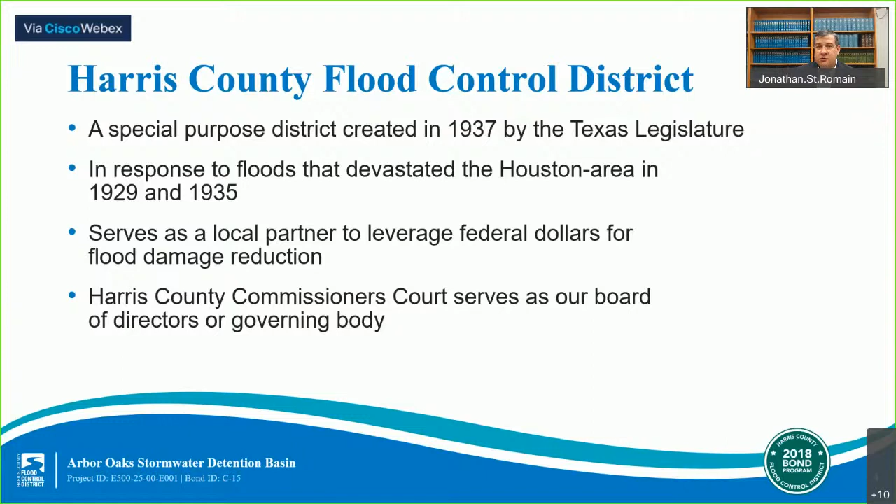The Harris County Flood Control District is a special purpose district, created by the Texas legislature in 1937 in response to devastating floods that hit the Houston area in 1929 and 1935. The Flood Control District was created to serve as a local partner to leverage federal funding for flood damage reduction. Our mission has greatly expanded over 80 years with billions of dollars in infrastructure improvements in the ground. While we are a separate entity from Harris County, the Harris County Commissioners Court serves as our governing body.

The mission of the Harris County Flood Control District is to provide flood damage reduction projects that work with appropriate regard for community and natural values. One of the most difficult challenges we face is constructing effective projects that are sensitive to community and natural values in a highly urbanized area.

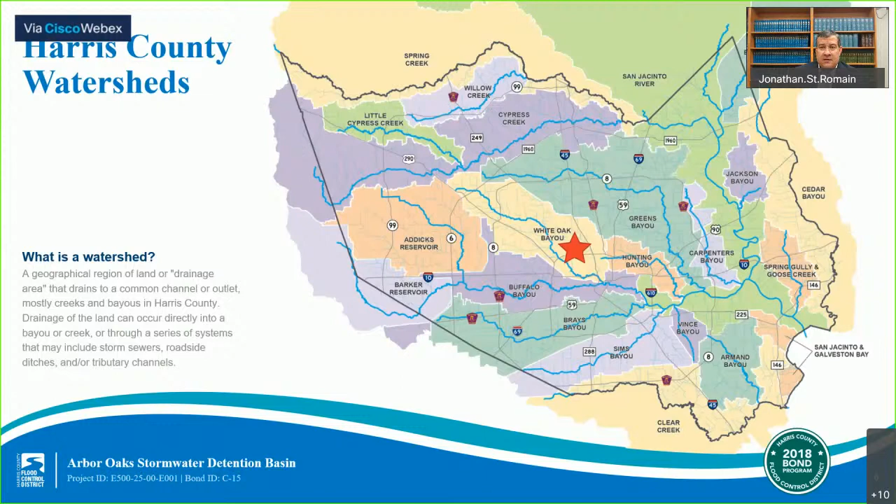Harris County includes 22 main watersheds, totaling approximately 1,800 square miles and more than 2,500 linear miles of channel. 2,500 miles is approximately the distance from New York to California. Each watershed has its own unique characteristics and needs, and tonight we're in the White Oak Bayou watershed of Northwest Harris County.

Our area is flood prone, and here are some reasons why. We're prone to extreme rainfall, including tropical storms and hurricanes. We have a flat and slow draining landscape, and we have clay soils that just don't soak up excess rainfall quickly.

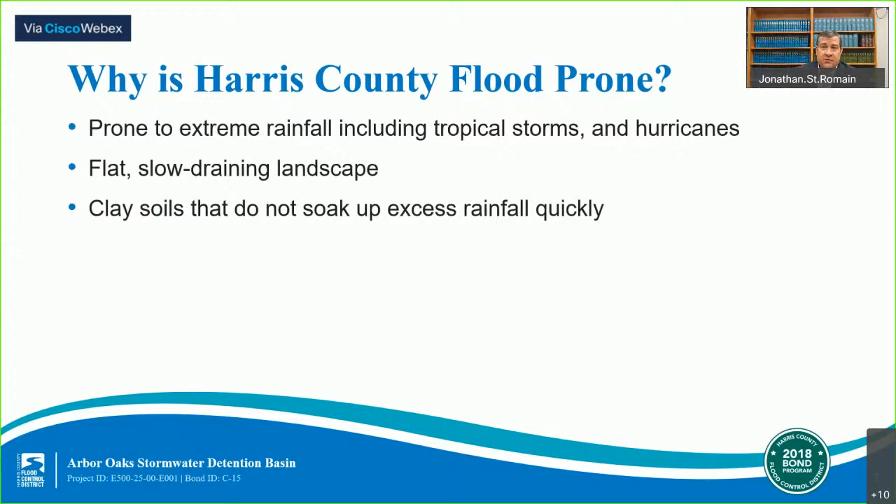In the middle is a stormwater detention basin, sometimes constructed by the Flood Control District. When storm sewers are increased, this creates an increase in runoff. Since it's our policy to avoid impacts to properties downstream, detention basins help to safely take in and temporarily store excess stormwater during heavy rain events. Often we participate with Harris County precincts, utility districts, and others to add recreational amenities such as trails to these basins and along our channels.

On August 25th, 2018, Harris County voters approved $2.5 billion in bonds for flood risk reduction projects. This vote followed a series of meetings across Harris County in each watershed, which resulted in a list of what is now 181 bond projects. 160 of those 181 projects have been initiated so far, including 7 projects in the White Oak Bayou watershed.

A total of more than $1.2 billion in partnership funding has been secured so far to stretch the 2018 bond program even further. The actual timing of each individual project will depend on a variety of factors, including environmental permitting, right-of-way acquisition, and utility relocation, and in some cases, requirements of a particular grant. That said, project lists and projected schedules are updated regularly on our website.

While the bond was for $2.5 billion, the full cost of every project in the bond tables is almost $5 billion. So we made it clear from the outset that we would need funding partners to fully construct the projects in the bond program. As I mentioned, we've had some success so far, having secured more than $1.2 billion in partner funds. This graphic illustrates the many sources of those partnerships, including federal, state, and local funding that the Flood Control District is working to secure for Harris County.

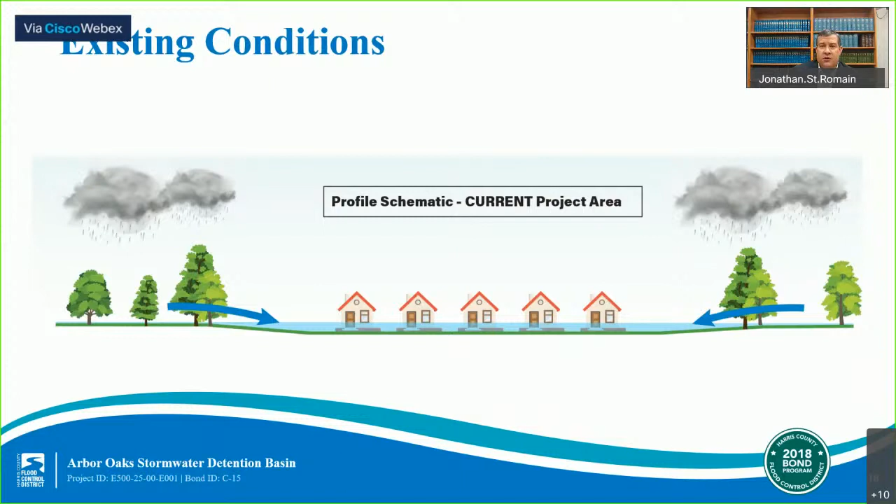The proposed project site is located within the 100 and 500-year floodplain, and along with Harris County's clay soils that do not readily absorb stormwater, the topography of the area creates a bowl-type effect that naturally causes stormwater to collect. By creating a stormwater detention basin within this area of Arbor Oaks, we can leverage the natural topography and increase the stormwater storage capacity to reduce flood risks for the surrounding area.

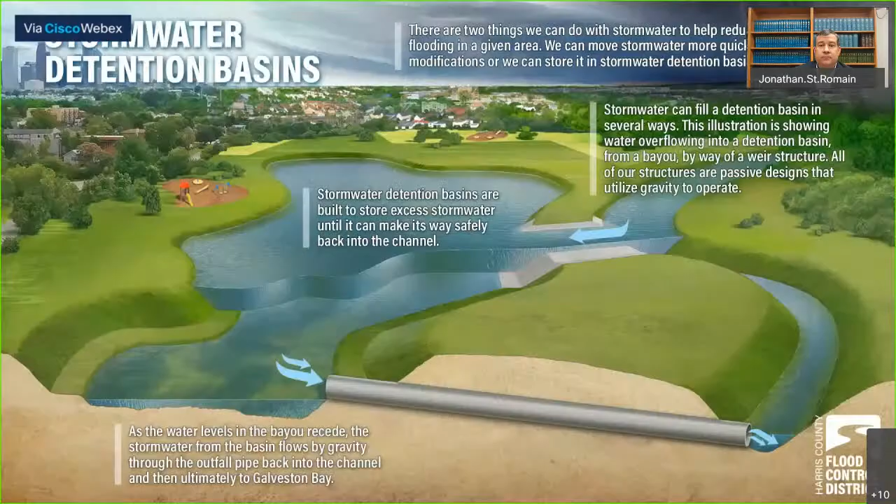There are two things we can do with stormwater to help reduce the risk of flooding in a given area. We can move stormwater more quickly by channel modifications, or we can store it in stormwater detention basins. A stormwater detention basin is built to store excess stormwater until it can make its way safely back into the channel and then ultimately to Galveston Bay.

There are several ways that stormwater will fill the detention basin, but all of our structures are passive designs that utilize gravity to operate. This illustration is showing water overflowing into a basin from a bayou by way of a weir structure. As the water levels in the bayou recede, the stormwater from the basin flows by gravity through the outfall pipe back into the channel.

The flood control district typically constructs two types of stormwater detention basins: wet bottom and dry bottom. Both fill up during heavy rain events and then drain as the receiving channel recedes. The difference is that one has a permanent pool of water and one has a dry and grassy bottom.

A wet bottom basin, which is what we are recommending for this project, typically has a permanent pool of water and can provide habitat for a variety of wildlife. A dry bottom basin, on the other hand, will fill up during a heavy rain event and then completely drain out once the storm has passed, and it can provide the opportunity for recreational amenities such as sports fields or parks to be built by others.

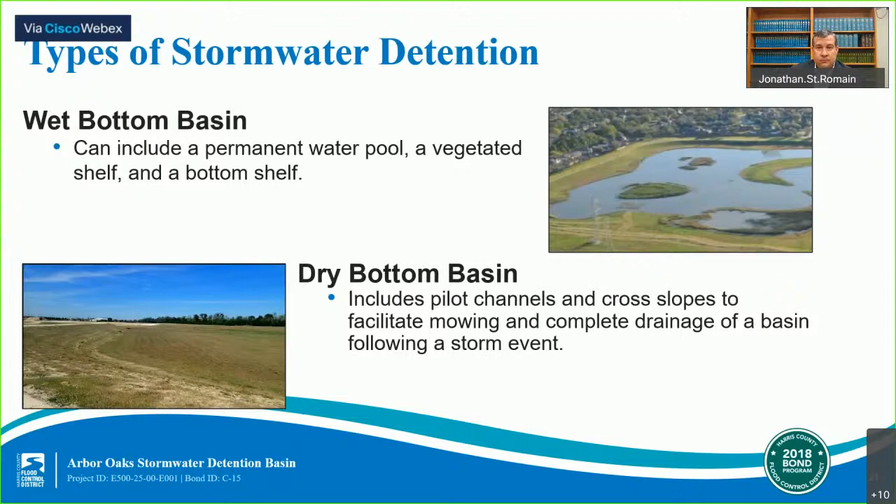Thank you, Jonathan. Melissa, Sergio is asking who purchased the Inwood golf course? Sure. The Inwood Golf Course was purchased back in 2011 by the City of Houston. And then later, Harris County Flood Control District and the City of Houston entered into an interlocal agreement to define that project and say that we're going to work with the City of Houston to build and construct that project.

Thank you, Melissa. Jonathan, Jessica is asking when we decided to start this project, and can you also elaborate on the bond program and if that played a part? Sure, the bond program definitely played a part, as well as the receipt of our Natural Resources Conservation grant. The funding is always a big thing, and when we get that availability, that a lot of times can help make projects happen.

All right, thank you. We are continuing to get questions in from you. Jonathan, we have a question about trees. Will trees be cut down? If yes, will they be replaced later?

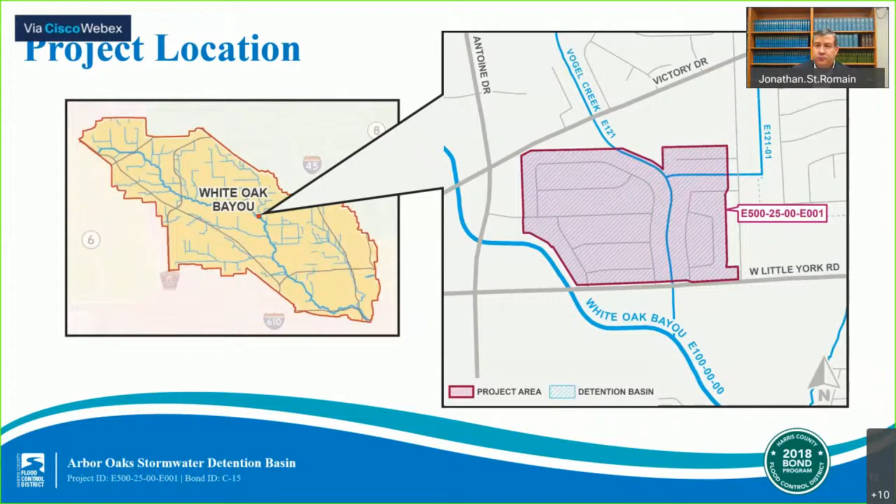Sure, yeah, and we can start on slide 12 here. Back to a little bit of the background of the project. White Oak, we're in the White Oak Bayou watershed, and it's approximately 26 miles long, flows from US 290 southeast to its confluence with Buffalo Bayou near downtown. This project area is located a little more than midway down the bayou, where it intersects with Vogel Creek in what is known as the Arbor Oaks subdivision, which was developed in the early 1970s.

Following Tropical Storm Allison and beginning in 2003, the Harris County Flood Control District initiated a robust countywide voluntary buyout program to help move eligible homeowners out of harm's way. That program included several homes, many homes in the Arbor Oaks neighborhood. And then following Hurricane Harvey, the 2018 bond program has allowed us to assess flooding needs and look at the property we already own to help reduce the risk of flooding throughout Harris County.

The project timeline.

Following voter approval of the 2018 bond, the Flood Control District initiated Bond ID C-15, the Arbor Oaks Stormwater Detention Basin. In 2019, Harris County Commissioners Court accepted the grant from the Natural Resources Conservation Service, NRCS, which is helping fund the design and construction of this project. It's important to note that under this NRCS grant guidelines, we must complete construction and other restoration efforts by October of 2024.

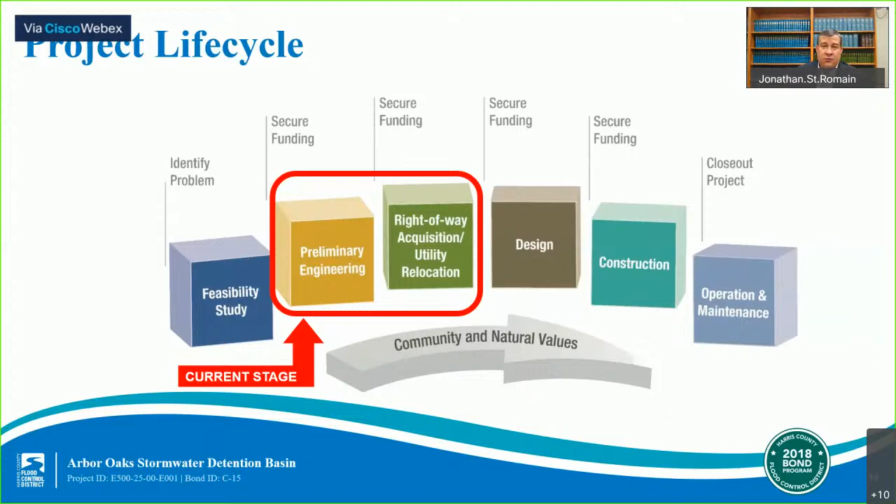Jonathan, residents in the area want to know if this basin will prevent them from flooding again. How can we answer that question for these concerned residents?

While we can never guarantee that anyone won't flood again, we can say that this project, along with the other nearby projects in the White Oak Bayou watershed, will positively benefit homes by reducing flood risk in the watershed.

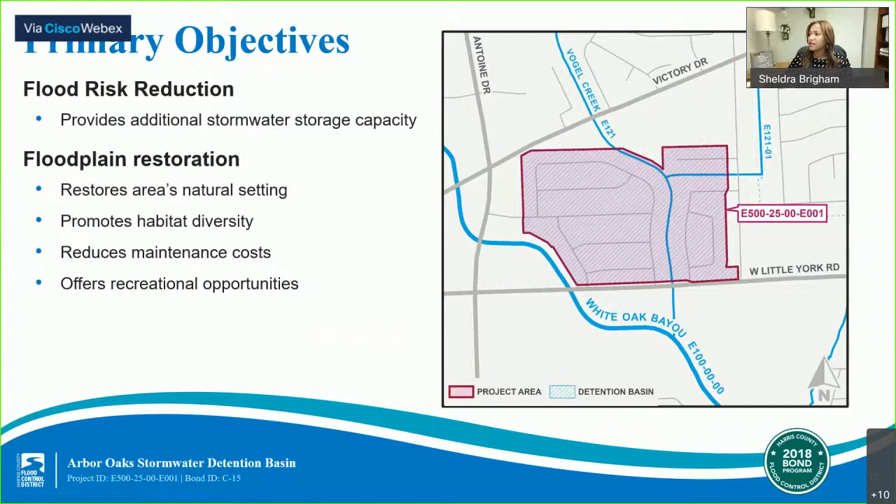We have a question from Nalani. Nalani says the presentation was excellent and self-explanatory in many ways, but how will this system affect flooding in my area, specifically at Antoine and Armcliffe, the intersection south of Eisenhower High School? Does the Stormwater Detention Basin tend to help Vogel Creek flooding more than west of Antoine?

You guys got all that? Yeah, I got all that. And...

Nalani, we may have to get back to you on the specific question. Right offhand, I can't look at our maps and compare the exact benefits that area will receive. But any specific questions like that, you can submit through our online system. I think we've got instructions here in the presentation on how to do that.

I'd just like to jump in and mention that the Inwood Forest Detention Basin is on the west side of Antoine Drive as well as the east, so it's going to provide benefits more specific to your area, as well as the federal White Oak Bayou project we're working on right now. But for any further specific questions, that project is now shown on the screen. You can submit your question, and we can get back to you with further details.

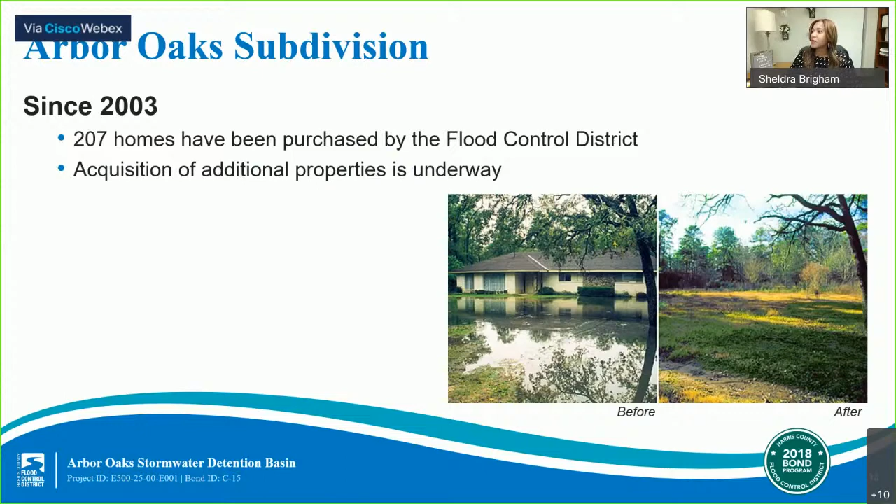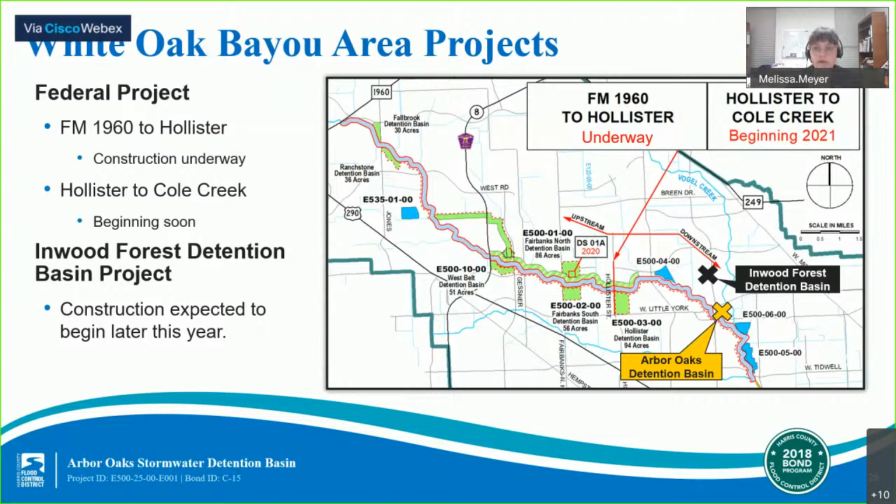Jonathan, Mary is asking if the detention could cause flooding to happen in areas that don't normally flood. So no, the detention basin would not cause flooding in areas that don't normally flood. For each and all of our flood control projects, we do impact analyses to ensure there is no adverse impact, or negative results, anywhere upstream or downstream that would take place due to our projects. Our aim is always to provide flood damage reduction projects that work, while also making sure there are no negative impacts anywhere else.

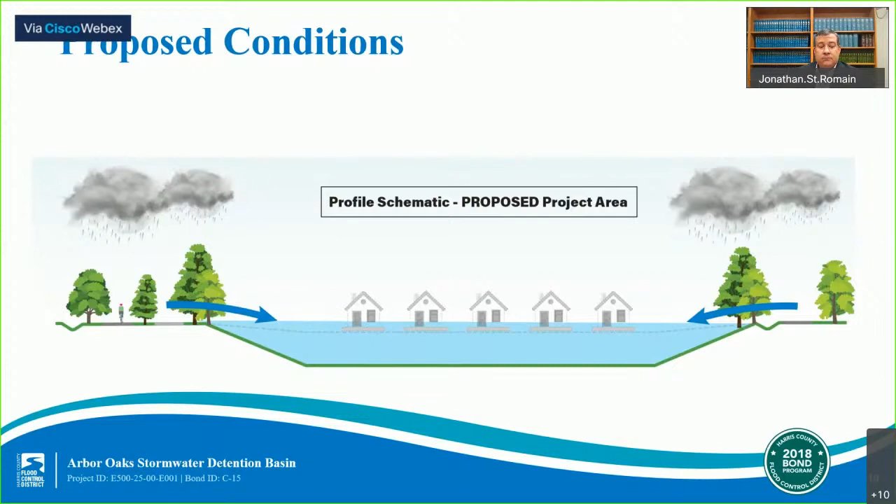Thank you, Jonathan. Can you talk about how the area near the basin might change for residents that live nearby but not in the footprint of the basin?

Well, sure. Ultimately, residents could have a nearby large area that will have been restored to what was previously existing floodplain, and also has these aesthetic features. We talked earlier about working with partners such as Houston Parks Board to potentially provide some connecting trails. So we think it could change for the better, providing a nice feature to the area.

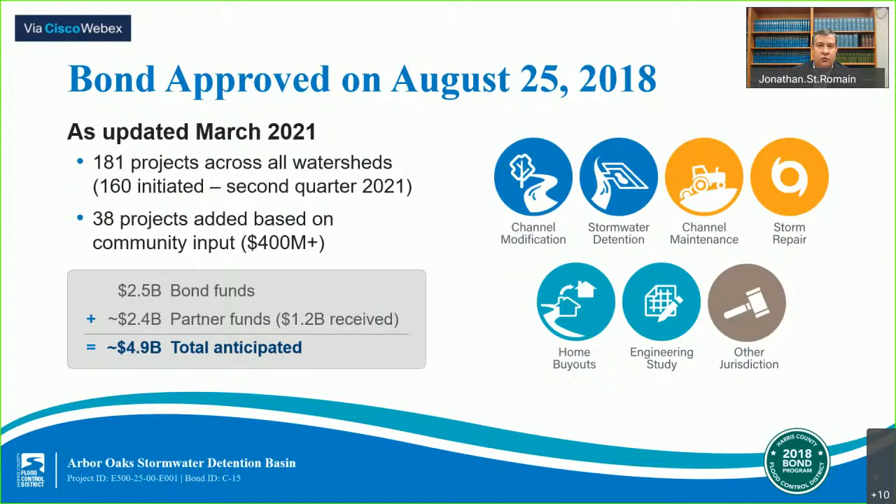Sure. The funding is coming from a couple of different sources, and one of those is our 2018 bond program, and the other is a grant we've been awarded from the Natural Resources Conservation Service. A large portion of our 2018 bond program does look at opportunities to receive partnership funding, and this is one of those projects where we're proud to say we're successful in this endeavor to receive partnership funding from the NRCS. The breakdown so far is $2.5 million from our 2018 bond program, and $10.8 million from the NRCS grant.

Good deal. Thank you, Jonathan. Leslie is asking if you can show the footprint of the basin again and talk about the area where the basin will be.

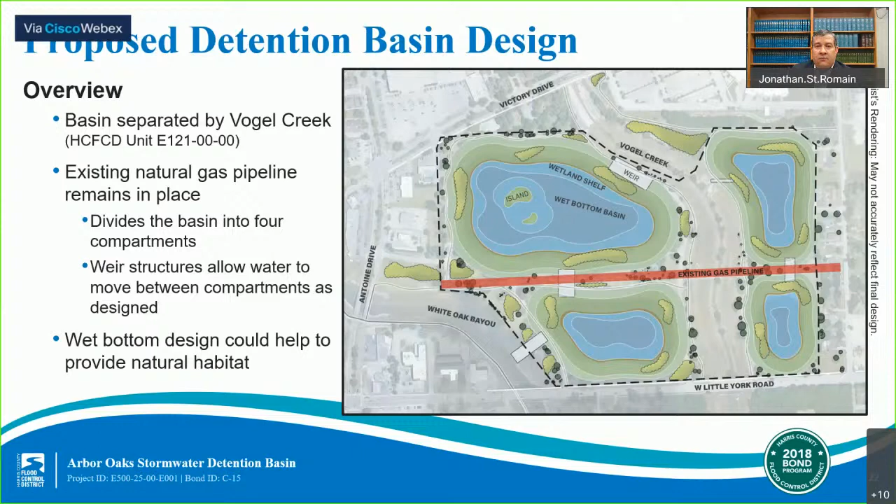Thank you, Jonathan. Looks like we're going to be wrapping up here shortly, a few more minutes to get your questions in. I do know one of the things folks always ask is the timeline. Even though we've gone over it a couple of times, maybe we can have that as one of the last mentions. If you could go over the timeline and next steps, Jonathan.

Sure. So very shortly, in these next couple of months, we will complete our preliminary engineering report and then move into the final design stage for the rest of this year. We expect construction to begin right about this time next year, in 2022. We have to complete construction and habitat restoration by October 2024 due to our deadline with this NRCS grant.

Thank you, Jonathan. I want to reiterate to folks again that for those properties we do not own, we are working directly with those property owners whose property is needed. Also, a lot of good questions tonight, but for those asking specific questions about property acquisition, we'll reach out to you after the meeting and address your specific property concerns.